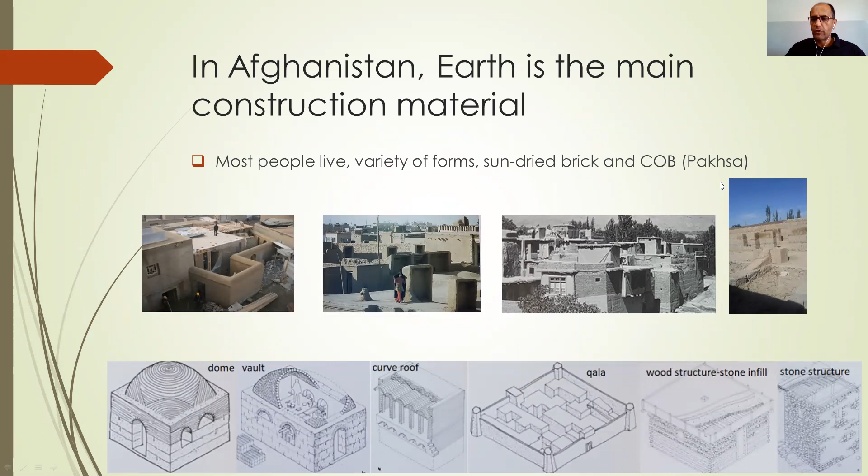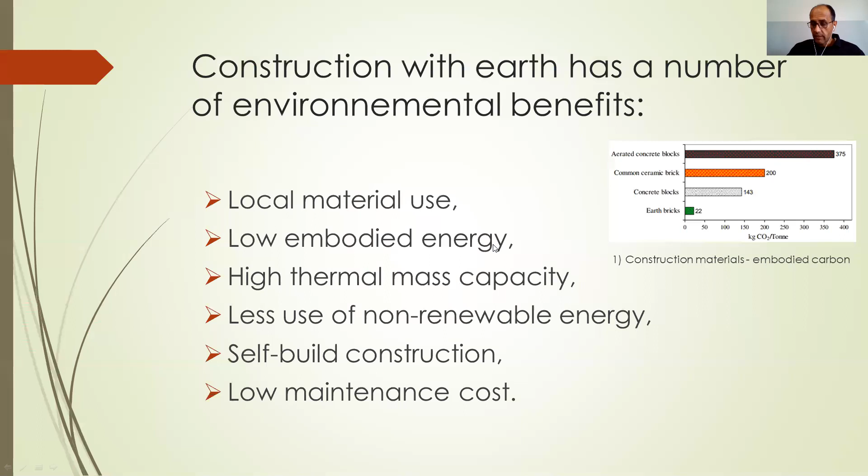Construction with earth has a number of environmental benefits, such as local material use and low embodied energy. As you can see here, earth brick has the lowest embodied energy compared to concrete. High thermal mass capacity, less use of non-renewable energy, self-built construction, and importantly, low maintenance cost.

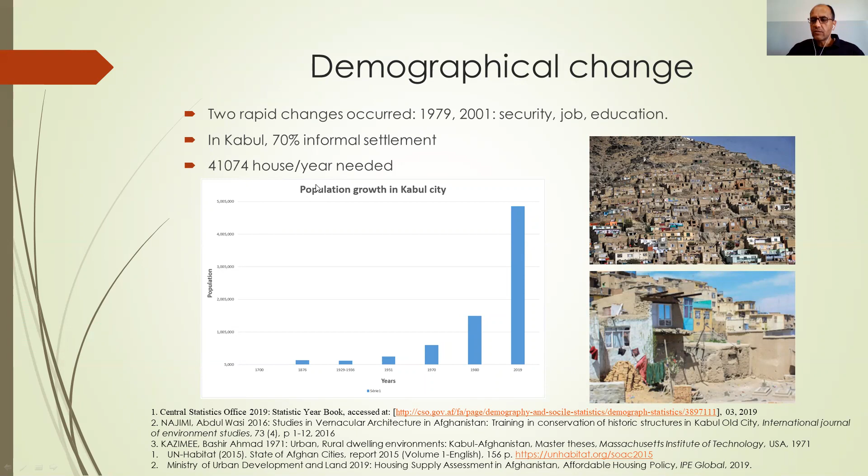For Kabul city, based on UN Habitat, we need 41,000 houses to be built between 2015 and 2025. Traditional housing in Kabul city is mainly courtyard houses. These courtyard houses have a bioclimatic approach. On the south face, we have a peak which prevents sun during summer and lets the sun enter the rooms during winter.

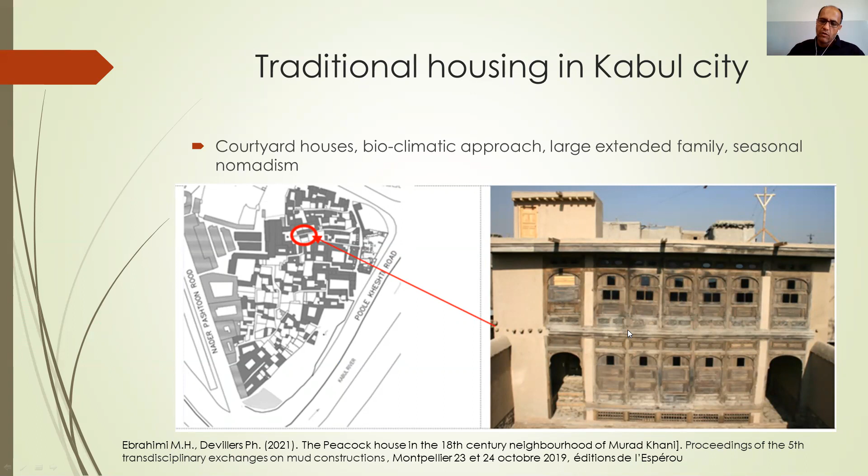We live in large and extended families, and we have south-facing rooms like this, which we benefit from during the winter, and north-facing rooms for summer.

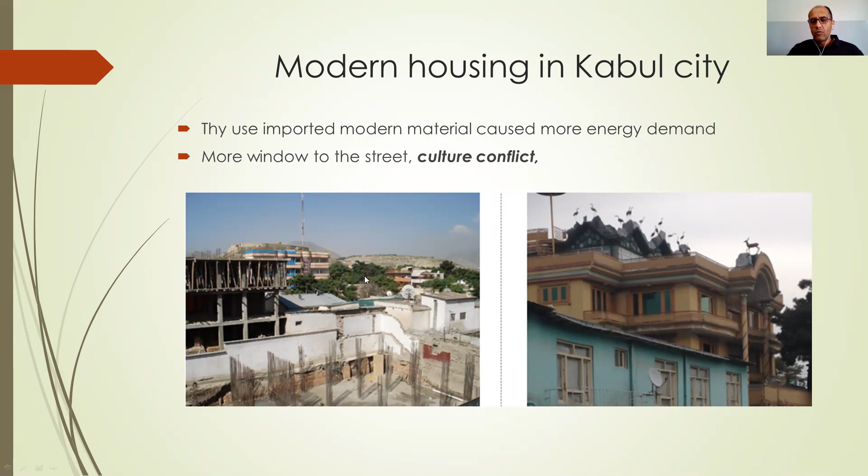The use of imported modern materials like concrete and steel structures causes more energy demand for housing. We can see a lot of the newly built houses in Kabul use modern materials. They don't use a bioclimatic approach. There are a lot of windows facing the street. It's really a cultural conflict. So we need to use traditional materials rather than these modern materials.

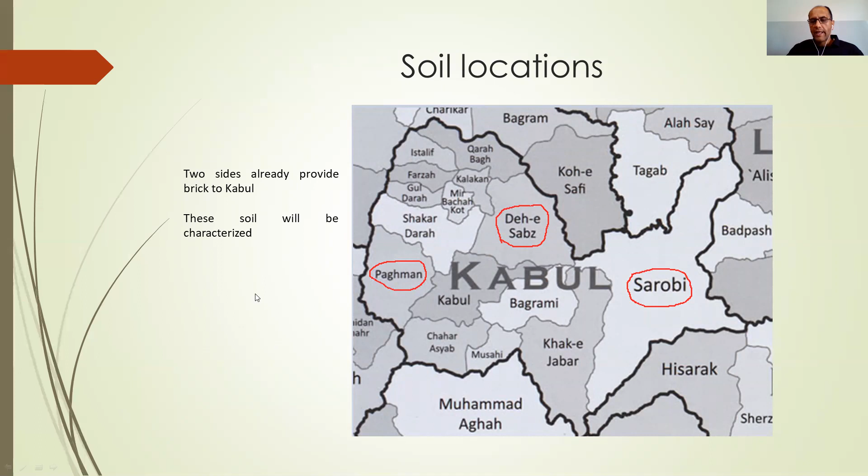For the soil location, we use three types of soil from three districts. Two of these districts, like Paghman and Deh Sabz, already provide bricks to Kabul city, to the center. And this soil will be characterized later in the other slides.

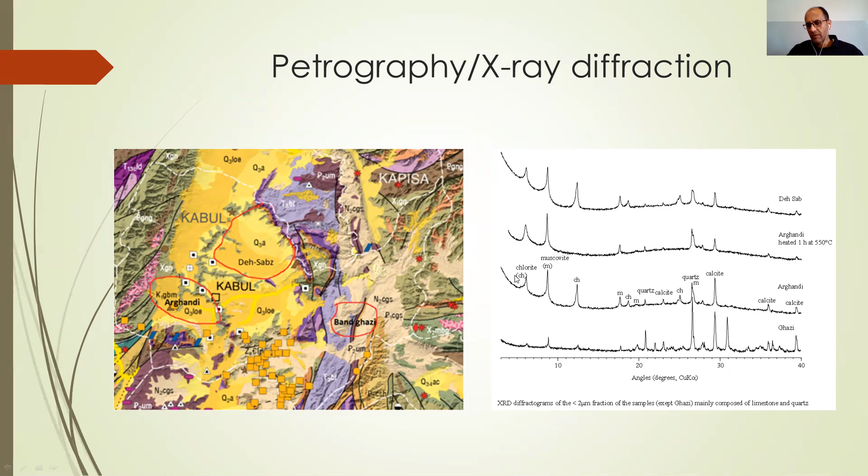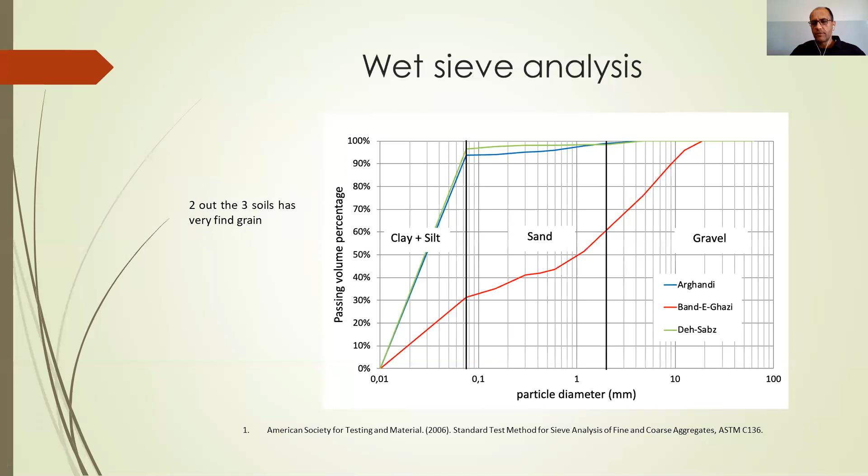Wet sieve analysis was performed to find the particle size distribution. Two out of the three soils have very fine grain, Deh Sabz and Arghandi. Deh Sabz has almost 98% clay and silt, while Arghandi has 93.5%. They both are more than 90%. But Band-e Ghazi is a well-graded soil, as we can see. For the Atterberg limits, we can see all three soils are slightly plastic.

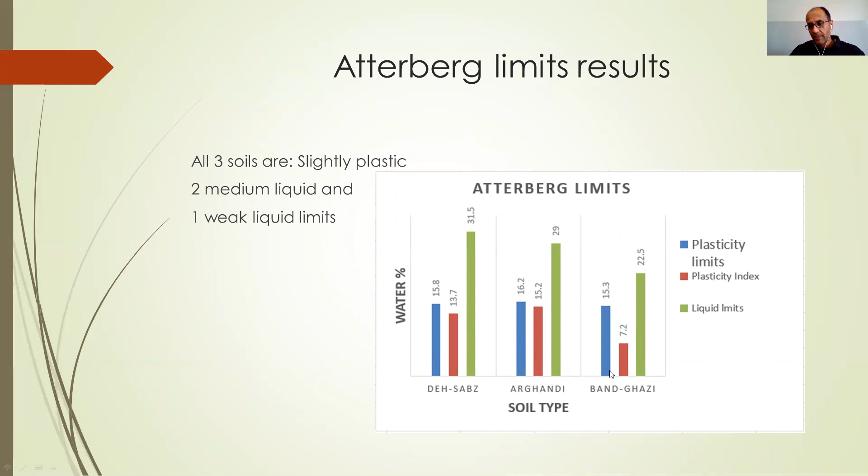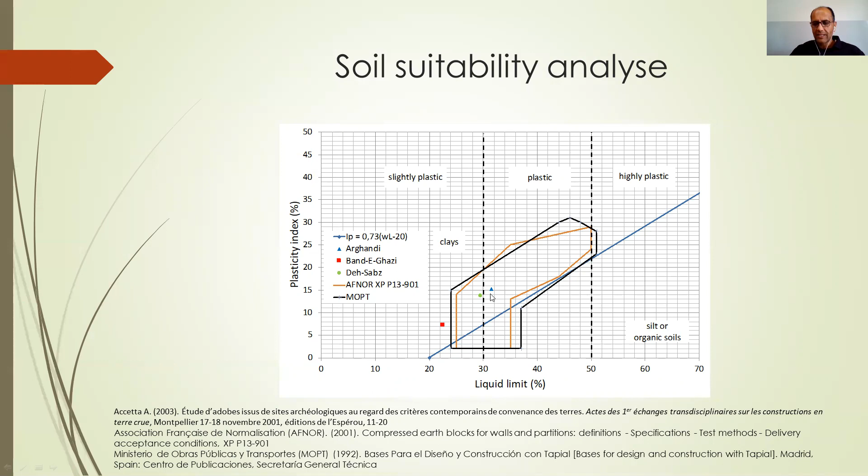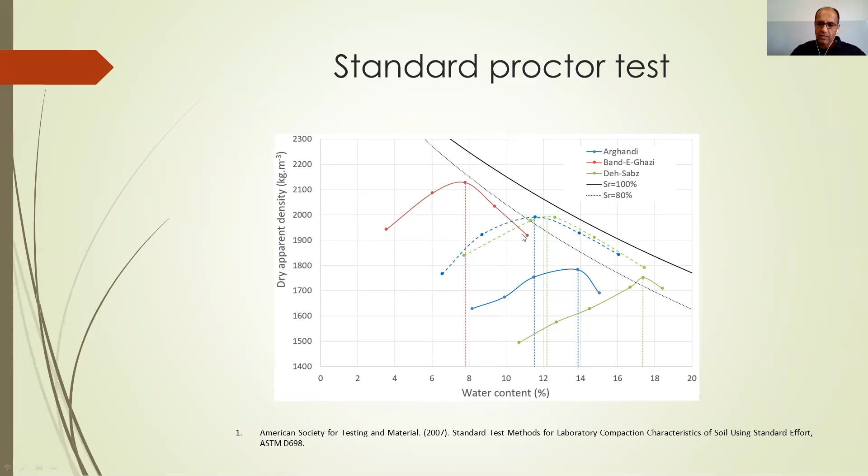This dashed blue and green line shows the reconstituted soil, because for compressed stabilized earth blocks, which we use cement, these two soils are very fine grained. There's not a lot of sand, so we used around 75% sand with this, and this is the result for the dry density.

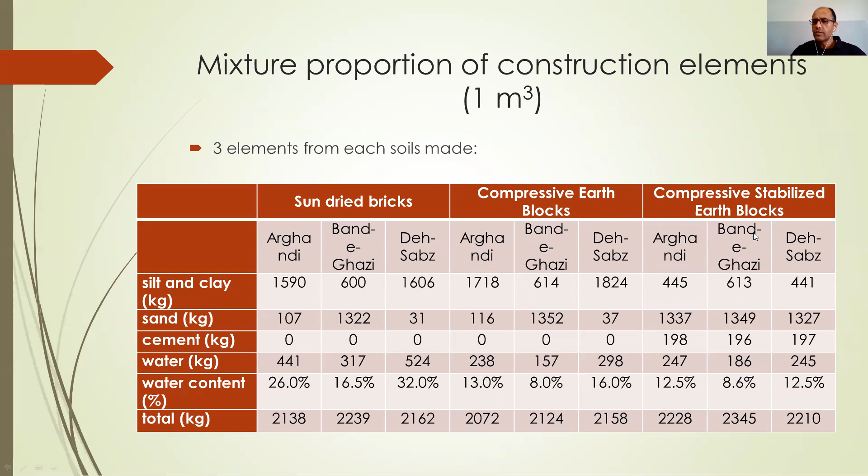For the mixture proportion, from those three soils, we developed three types of elements: sun-dried bricks, which we use traditionally, and two modern elements, compressed earth blocks and compressed stabilized earth blocks, to which we add cement.

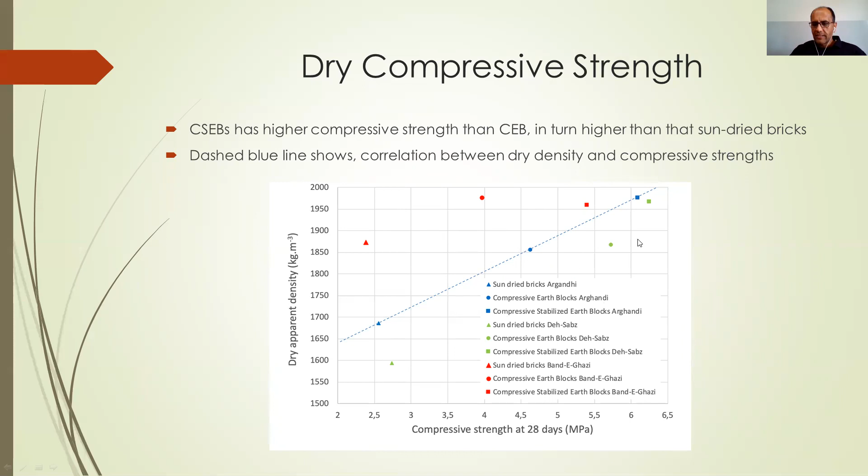The dry compressive strength of these three elements, sun-dried brick, compressed earth block, and compressed stabilized earth block, shows that CSEB, which has cement, has higher compressive strength than CEB without cement, and in turn CEB has higher compressive strength than sun-dried bricks. This dashed blue line shows the correlation between dry density and compressive strength. The more the dry density is, the more compressive strength we get out of these elements.

We can see in this binder intensity index that all elements have a compressive strength higher than 2 MPa. It shows that using cement is not efficient, because we use a lot of cement to get almost similar compressive strength. So in that case, sun-dried brick and CEB have a good compressive strength. We will not use CSEB or cement, because it's not an efficient way of using cement.

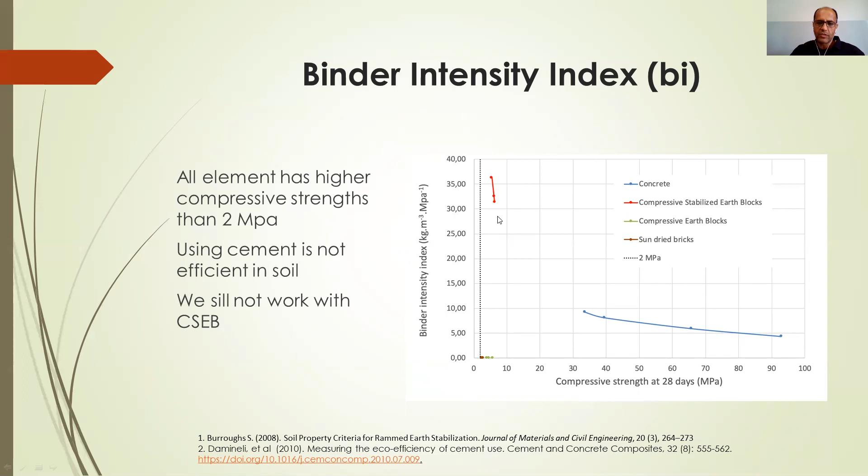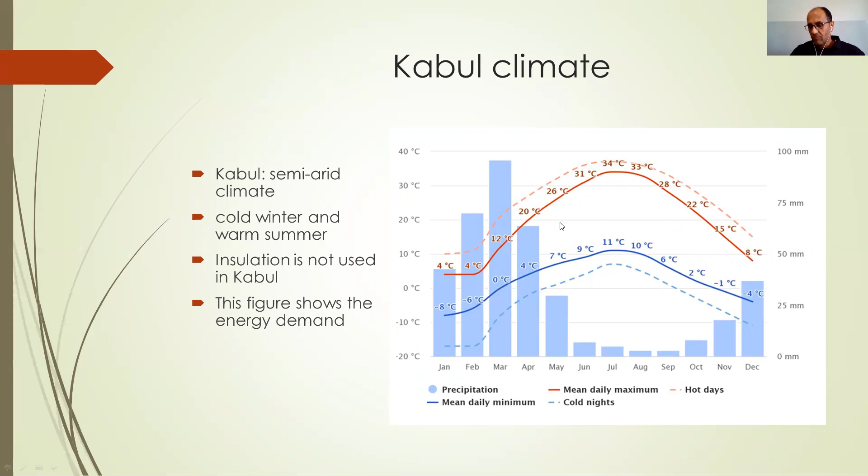For the Kabul climate, we have a semi-arid climate, which has cold winters down to -8 and warm summers up to 34 degrees. So this figure shows that there is an energy demand for Kabul, and we also need insulation because there is a big variation of climate between summer and winter.

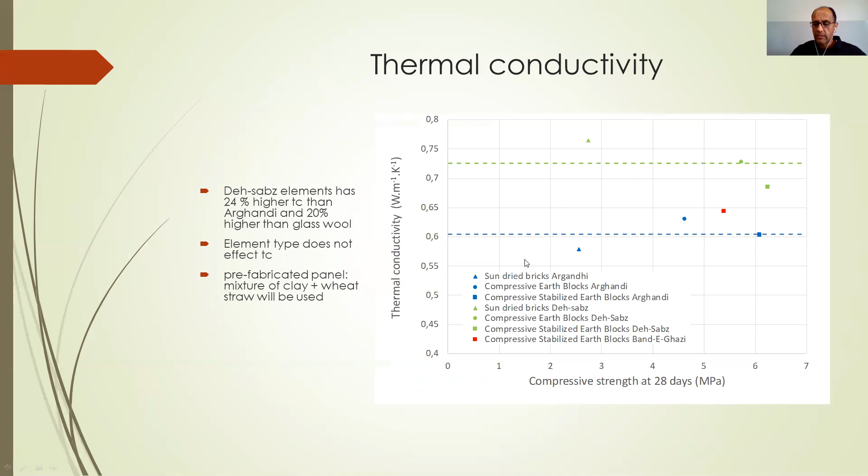The thermal conductivity, as we can see, the dashed green line shows the thermal conductivity for Deh-sabz, which is 24% higher than Arghandi, and 20% higher than the thermal conductivity of glass wool. We can also see that whatever the element type is, it's not really affecting the thermal conductivity of this soil. And since the thermal conductivity is high, we need to develop a prefabricated panel mixture of soil and wheat straw to use for the external walls to prevent this thermal conductivity.

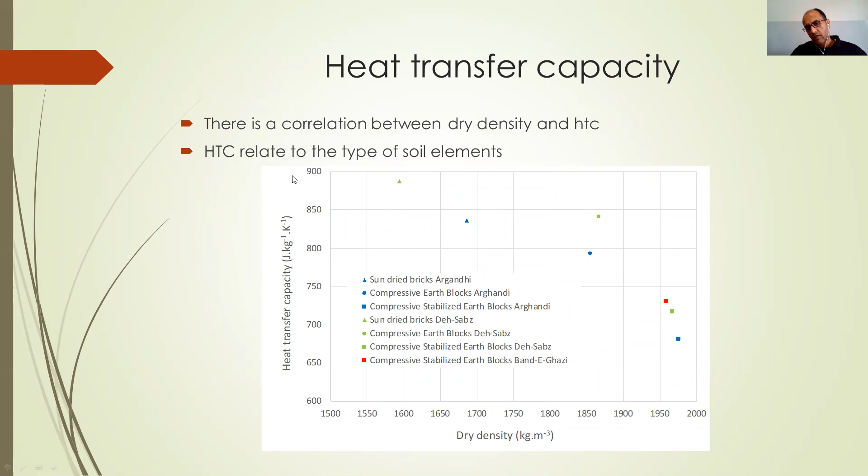And also heat transfer capacity: we can say there is a correlation between dry density and heat transfer capacity. The more the dry density is, the better the thermal conductivity is. So heat transfer capacity is related to the type of soil element, as we can see here.

The findings of this paper showed that sustainable design for affordable housing in Kabul should necessarily learn from the past to invest in the local identity. The importation of Western-style housing revealed apparent cultural conflict and significant environmental issues. So we need to conserve the traditional housing system in Kabul city. Considering the environmental issue, stabilization of earth with Portland cement is not efficient, so CSEB, or compressed stabilized earth block, is not interesting for this study.

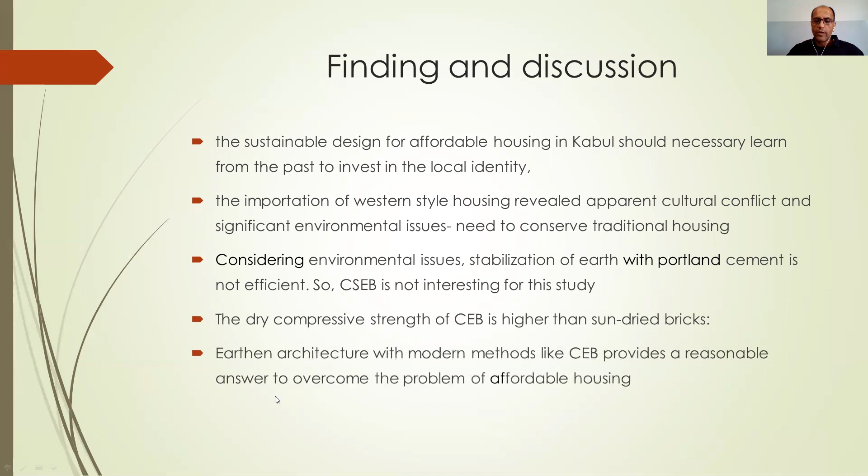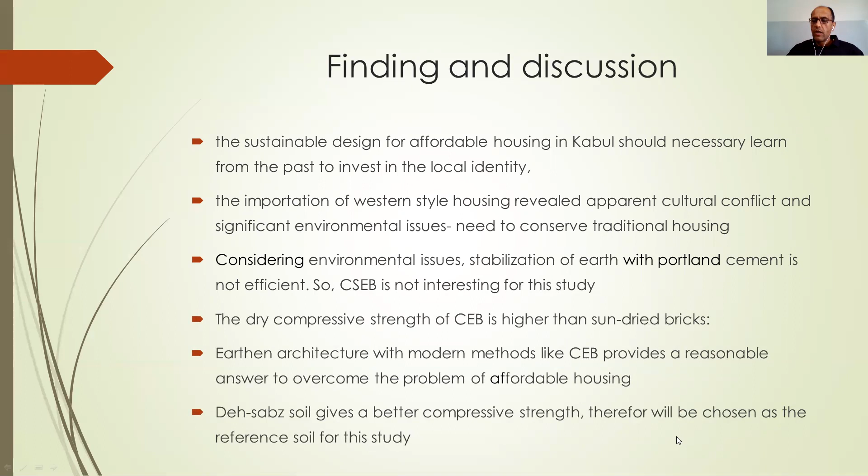The dry compressive strength of CEB is higher than sun-dried bricks, as we see on the figure. So earth architecture with modern methods like CEB provides a reasonable answer to overcome the problem of affordable housing for Kabul city. Deh-sabz soil gives a better compressive strength, as we saw. Therefore, it will be chosen as the reference soil for this study.